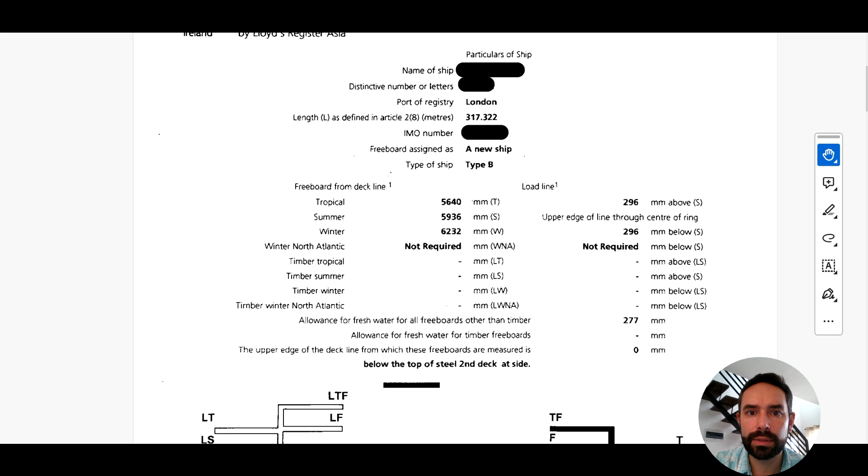And you can see here, originally the freeboard was assigned as a new ship, which is not surprising, and she was a type B ship, which means she was not a tanker. Different calculations for tankers because they are intrinsically more watertight because they don't have very many holes in them.

The details on the freeboard and the marks, these marks are to be permanently marked upon the hull with welds and painted, and the quality of those marks and the paint is something that will be inspected during every survey.

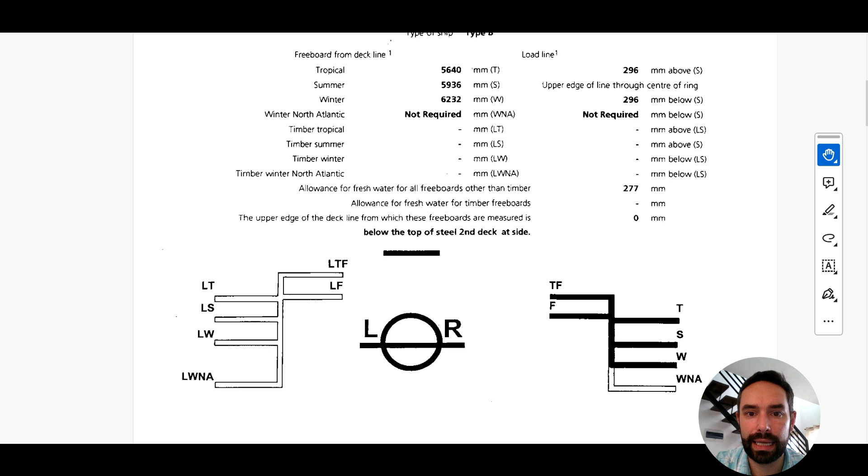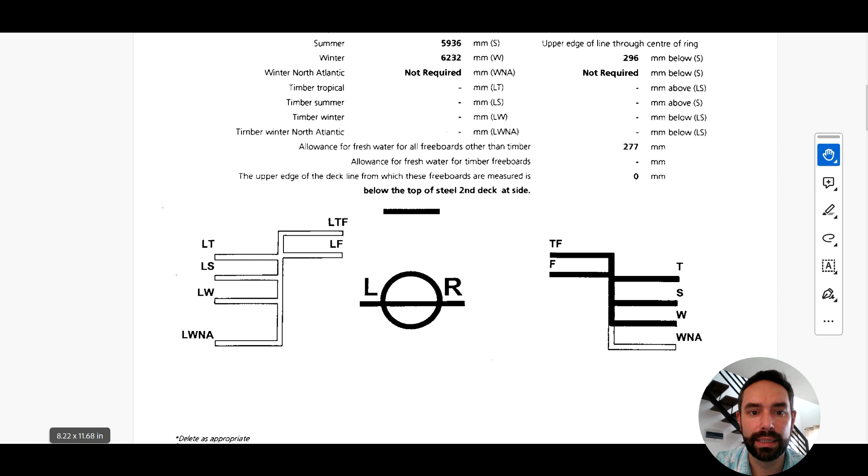The actual distances here in millimetres from the deck line, and the position of the deck line is indicated as well. So you should be able to find all of these marks. Obviously the ones in black are the ones that are required to be marked, and because this is not a timber carrying ship, she is not issued with a timber or lumber freeboard.

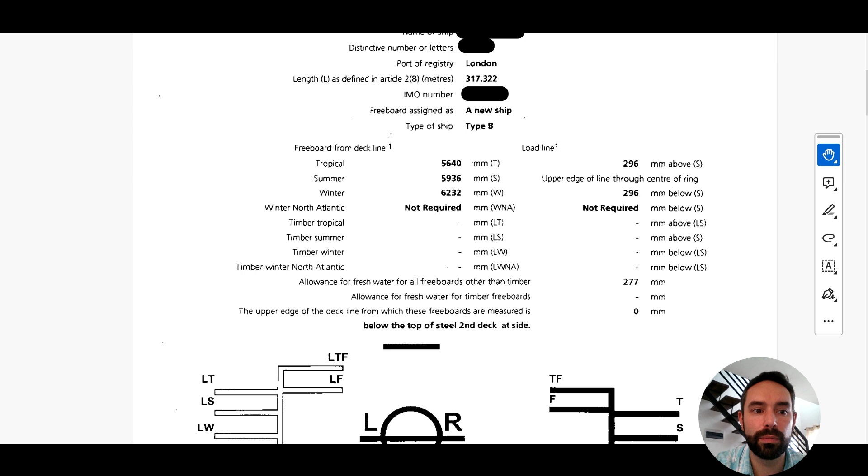Then on the second page you will find, let's go back. This information also will probably be transcribed into your official logbook and will form the basis of your freeboard calculations on departure from every port.

Interesting fact. So this certificate was valid 2014 and was valid until 2019. They're 5-year certificates in line with the harmonisation of certification. It was issued by Lloyd's Register, and at the time when I took a copy of this had 2 annual surveys, one in 2015, one in 2016, and they was endorsed accordingly by the Lloyd's Register surveyor.

Now, useful though this certificate is, this is not the key information on what we'll be inspecting during a load line survey. That instead comes on the attached document, which is the conditions of assignment. So attached to or stored also with your certificates, the record of conditions of assignment.

This is not reissued with every certificate. However, the information is unlikely to change short of a fairly significant dry docking period. This was the original one issued in 2014 as the ship was built in Korea or Japan, I can't remember. And you will find every single one of the conditions of assignment.

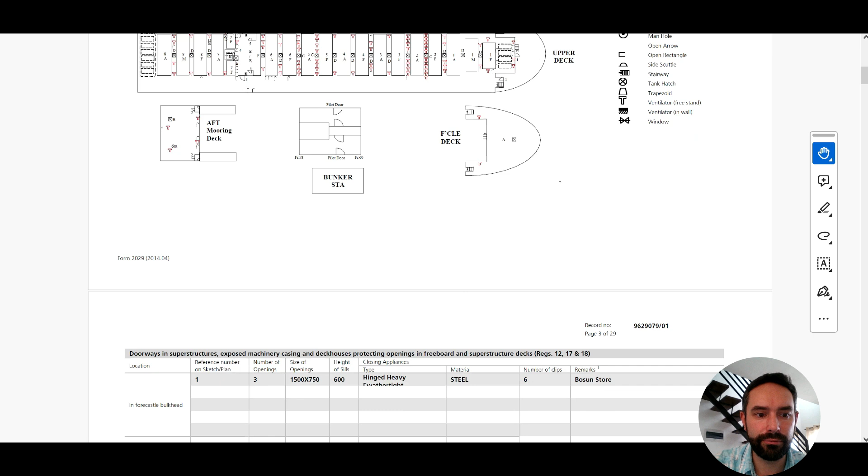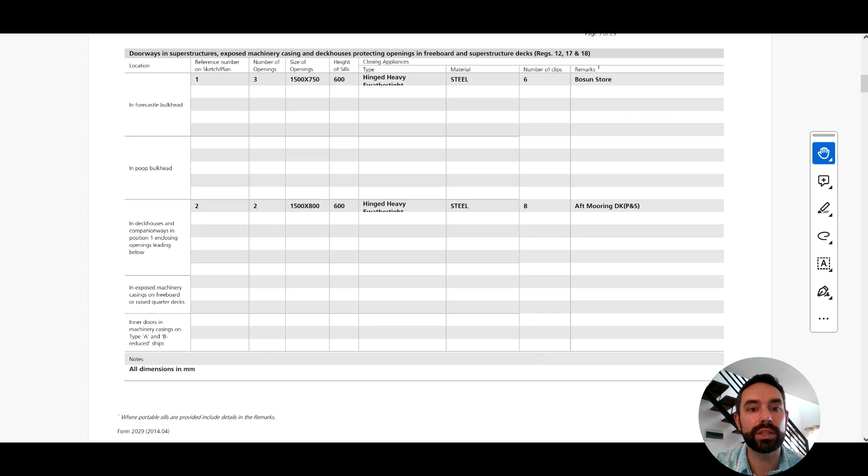Every one of these conditions of assignment must be provided in order for the ship to be issued with a load line certificate. When they're issued with that certificate, they have the conditions of assignment upon which it was based listed in this COA document which we have with us. And at each survey, these conditions of assignment will be inspected to make sure that they are still in good order and in the condition they were when the initial survey was carried out.

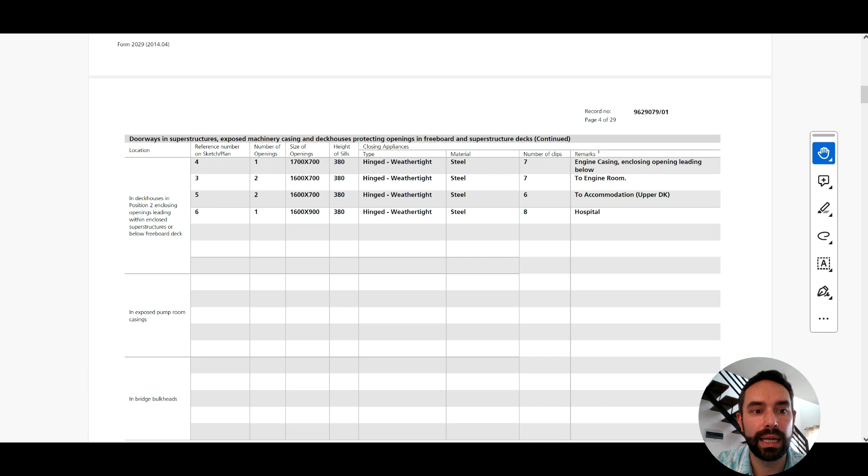Obviously, if the surveyor spots anything he feels is deficient to the weathertight or watertight integrity of the vessel as he's making that survey, that would also be picked up. It is not an inspection of the condition of the hull. That would take place as part of classification surveys, assuming the vessel is classed, and in the safety construction or PSSC inspections, normally during inspection of the ship bottom at every dry docking period.

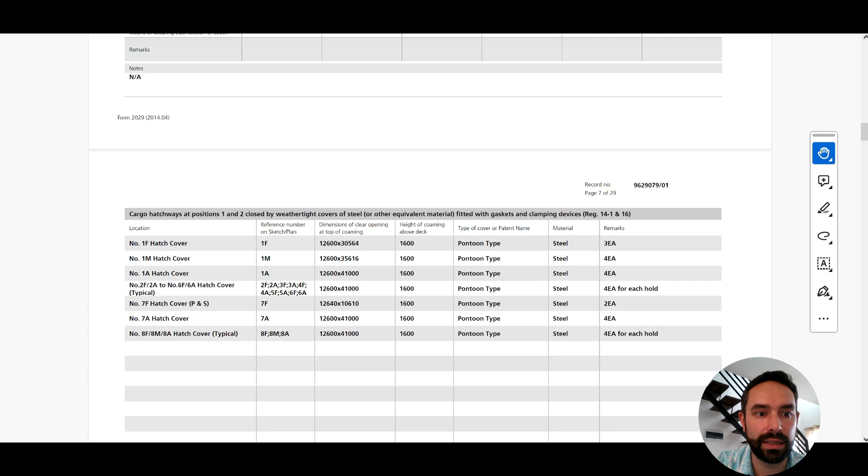Or in-water surveys every year. You can see this obviously is a container vessel. She does not have a lot of these things. She doesn't have hatch covers, portable covers, but there is space nonetheless here for everything. She does have big hatch covers for the container holds, and small hatches in the deck, so they're going to be looking - these ones are hinged - at the quality of the hinges.

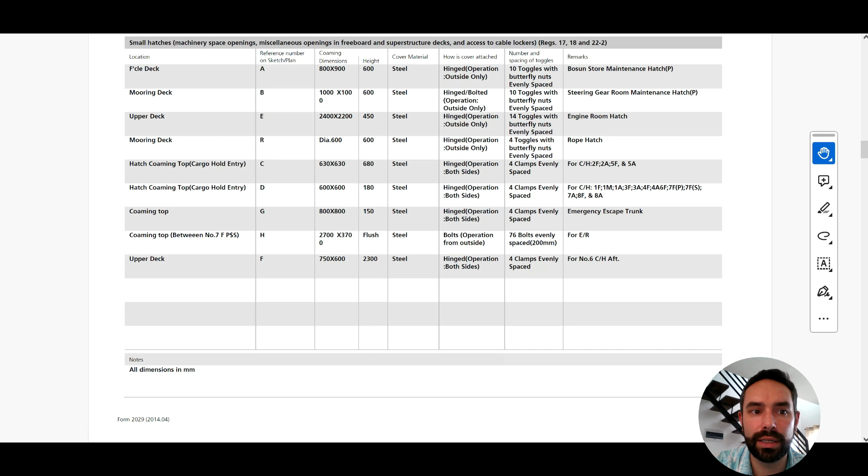They are toggled with butterfly nuts. They're going to be looking at the quality and any degradation on those.

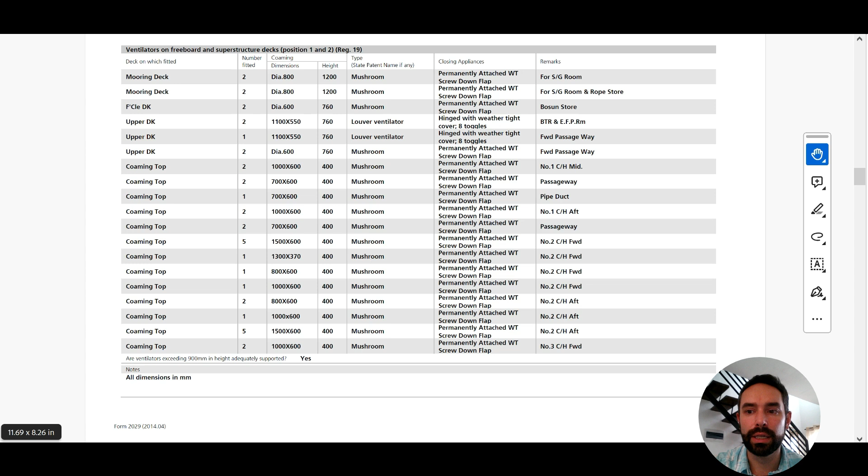And as a brief aside, let's not forget that load lines, as with most statutory surveys, are not there to protect the owner or the charterer or the cargo. They are there to protect the seafarers that work upon these ships. They're there to make sure that we are not working on substandard ships that have a risk of sinking or a risk to our health, and that we can't be taken advantage of by owners or charterers who would want to overload ships.

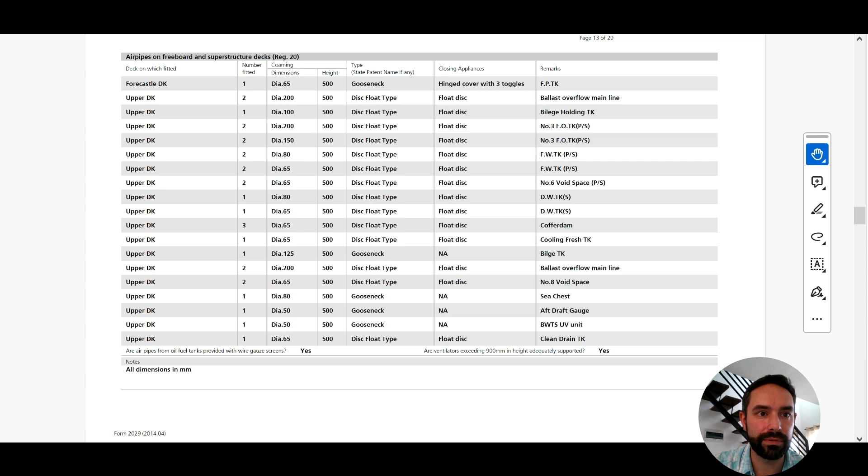So we have this long list of conditions of assignment, and really the best thing to do in advance of the survey is simply split these up between the relevant disciplines. Some of them are going to be more relevant for the chief mate and the boatswain, others more relevant for the chief engineer, and simply inspect that all of these conditions of assignment are in good order.

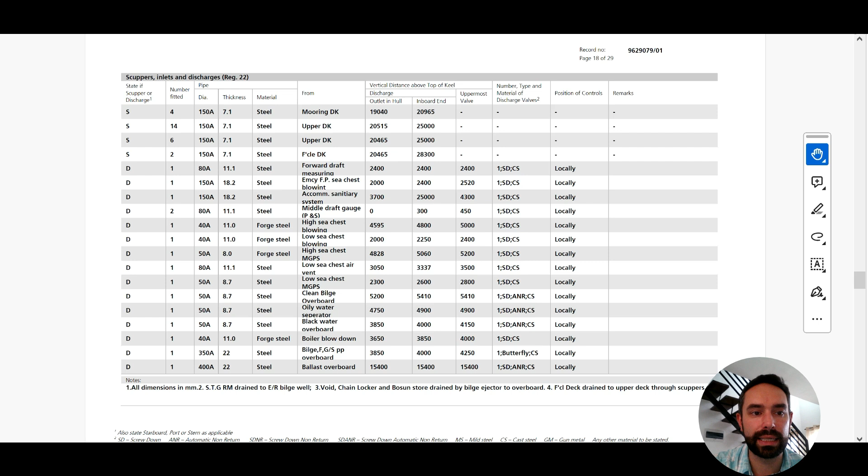Companionways and walkways around need to be properly protected around the forward end of the vessel, and scuppers and discharges are all in good order. Portholes have attached deadlights if required, and those deadlights are in good order and can be closed watertight.

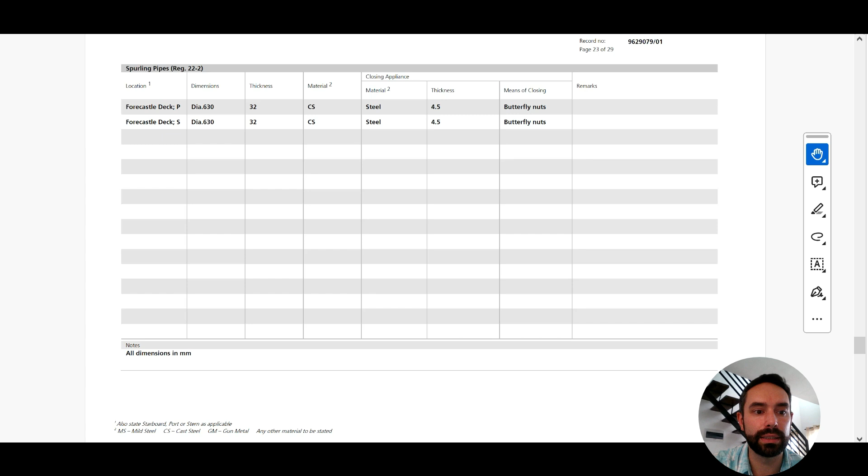Fundamentally, the load lines require any openings below the freeboard deck to be watertight and openings above to be weathertight, and they're all listed here.

And if you are not sure, or you're coming up for maybe a first survey, don't forget we can go back to the MCA guidance on here, and this will show us, first of all, the text of the convention, which is fundamentally the basis of the rules, and then show the MCA guidance.

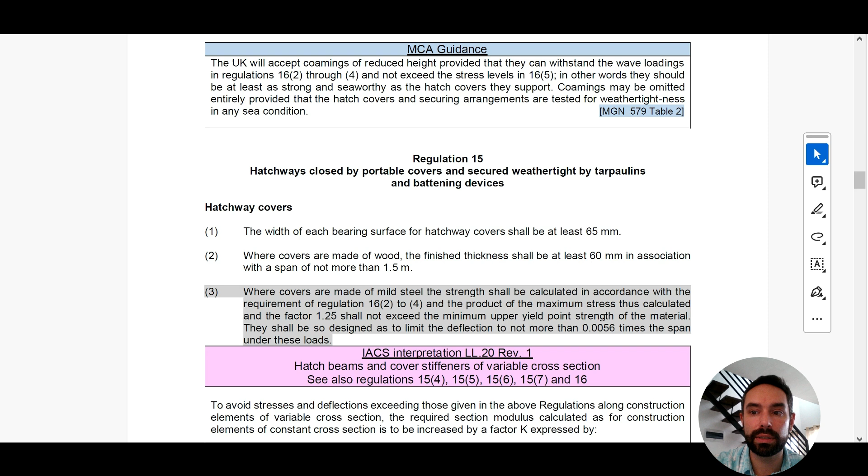So it's not a particularly interesting chapter, but perhaps we can find one. Sometimes how the locations of doors and things are located gets a little bit detailed. You just have to trust that the shipbuilder's done it correctly, but assuming it's on the conditions of assignment list for your ship, then the positioning of it has already been checked. We're just checking to make sure it remains in good order.

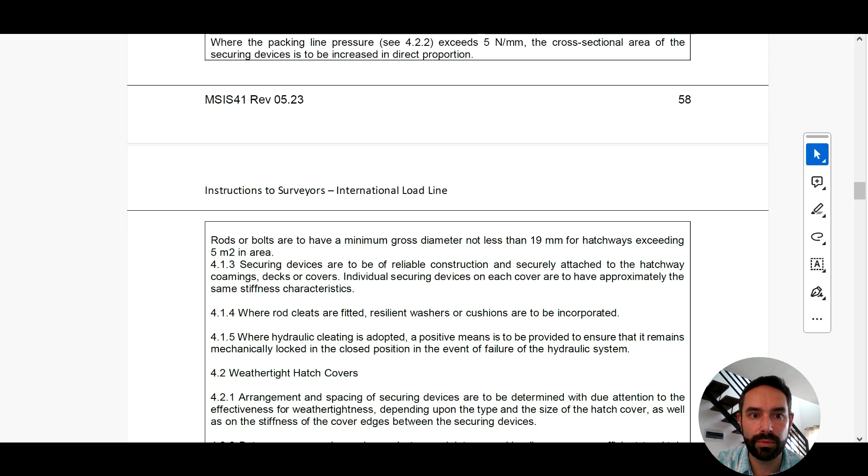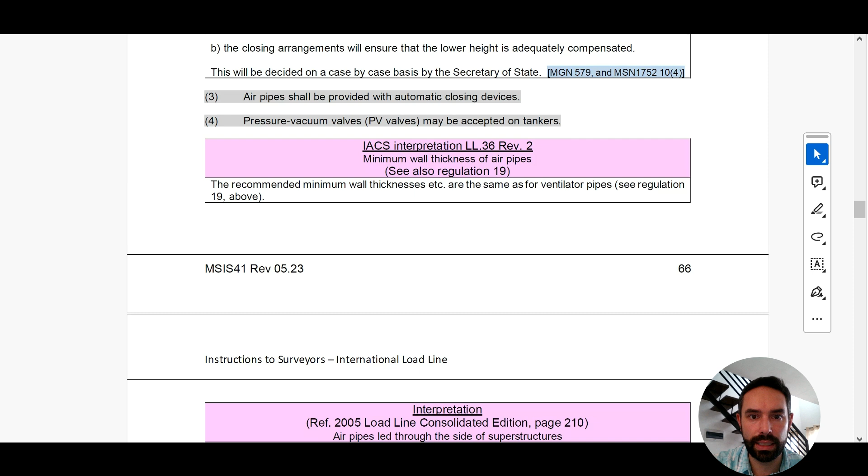So let's find something a little bit more here. I know there's good stuff towards the end. Hatch covers minimum loads. Air pipes - often overlooked, mainly because they're quite hard to check ourselves, often hidden away. Scuppers. Some pretty pictures. Garbage chutes - who has them these days?

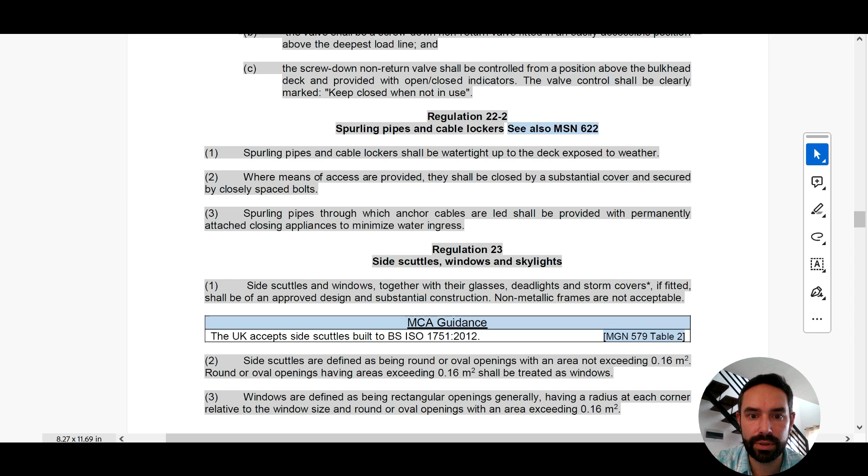So, for example, side scuttles, windows and sides and skylights. Side scuttles, windows, along with glasses, deadlights and covers, shall be of approved design and substantial. Non-metallic frames not accepted.

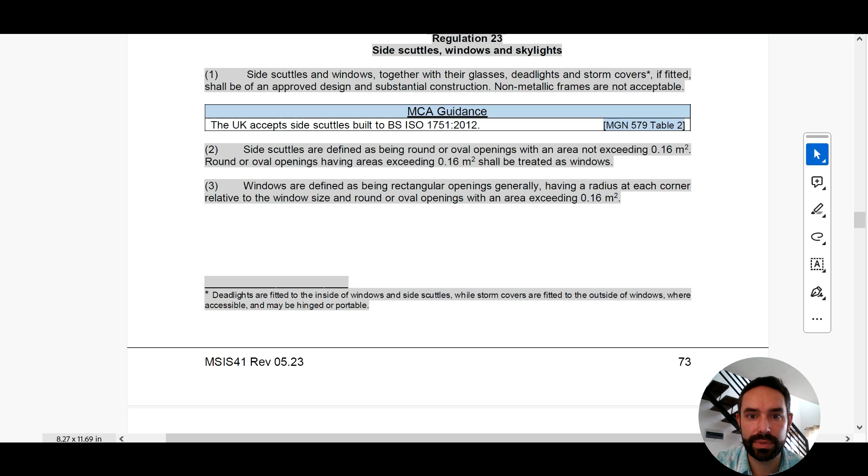And then we come to where windows shall or shall not be positioned. Starting there from 8, side scuttles and windows in the second tier, as defined above, shall be provided with hinged inside deadlights. So if you're not sure when you're inspecting, say, cabins - not that we would normally have cabins below the freeboard line, but in passenger ships we may well - we should see these windows, the portholes, must be capable of being closed and secured weather tight.

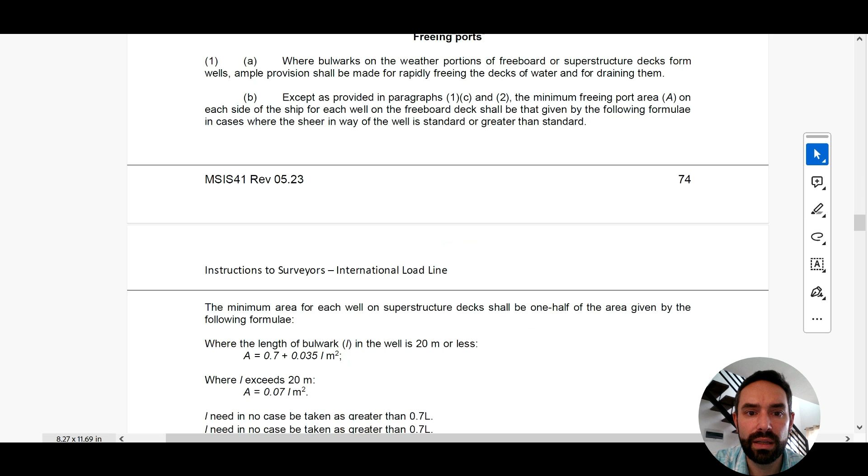Freeing ports must remain free and clear. They should not be obstructed. And there's lots of stuff there about the heights of gutter bars.

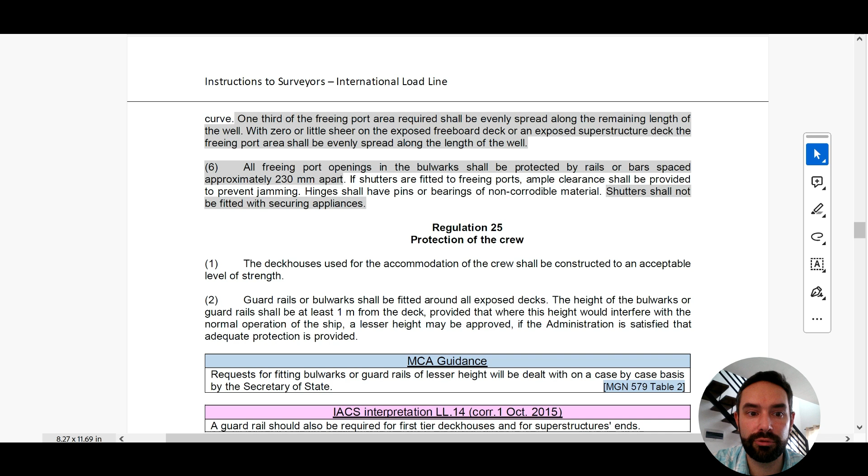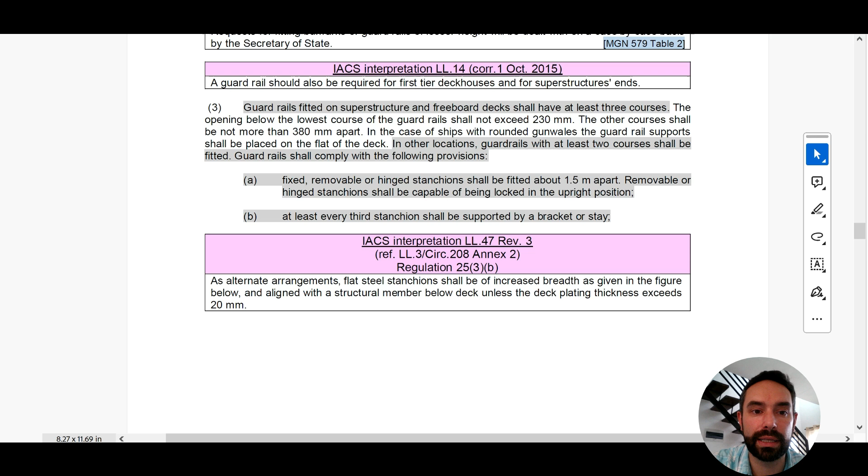Protection of the crew - this one is often a big focus by surveyors when they come on board, and a particular one is the security of guardrails and bulwarks in exposed areas. I'm thinking there on the forecastle, around the forward mooring deck. And because the focus of the survey, as always, is on the safety of the vessel and of the crew, things like guardrails are very much something that will be examined.

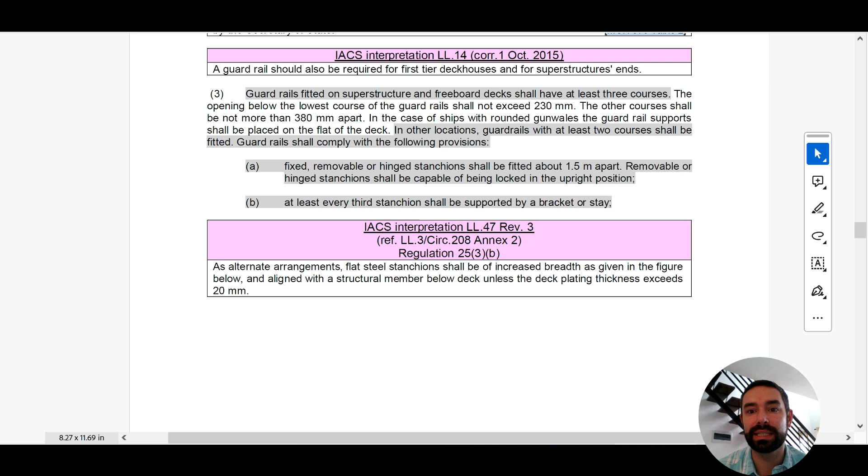They're also something that it'd be easy to mess up, I think. It wouldn't be unfeasible for maybe one of our stanchions to have become damaged and us to have repaired it, but then maybe we don't put them exactly 1.5 metres apart or less. So that's definitely something to check ahead of the inspection. And there's even little drawings there.

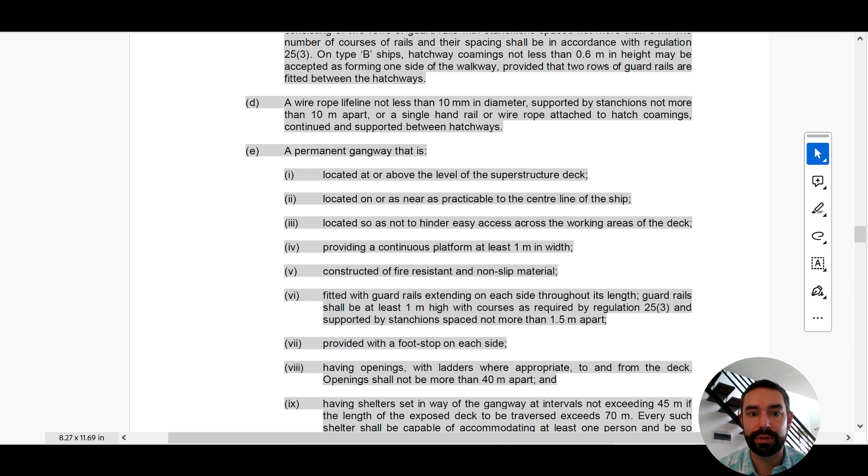Means of safe passage, and that's all about making sure there's permanent walkways through to less accessed parts of the ship. Anyway, very good document, this MSIS 41, definitely available on the internet. And there's a few other resources I thought we'd have a look over as well.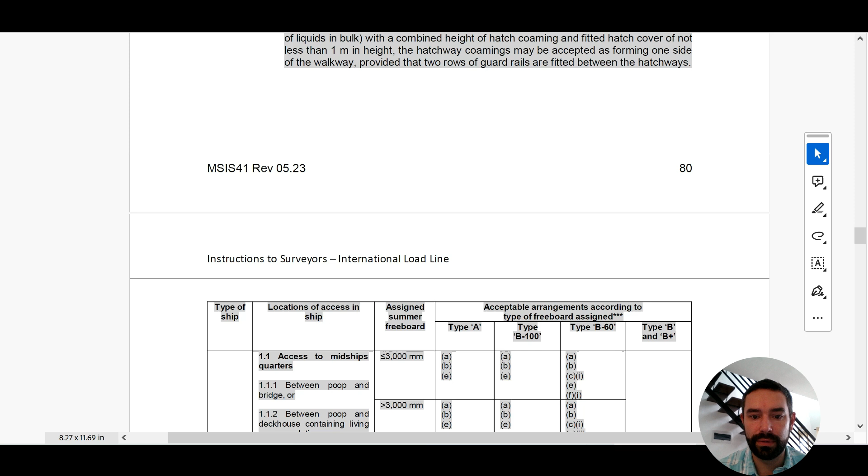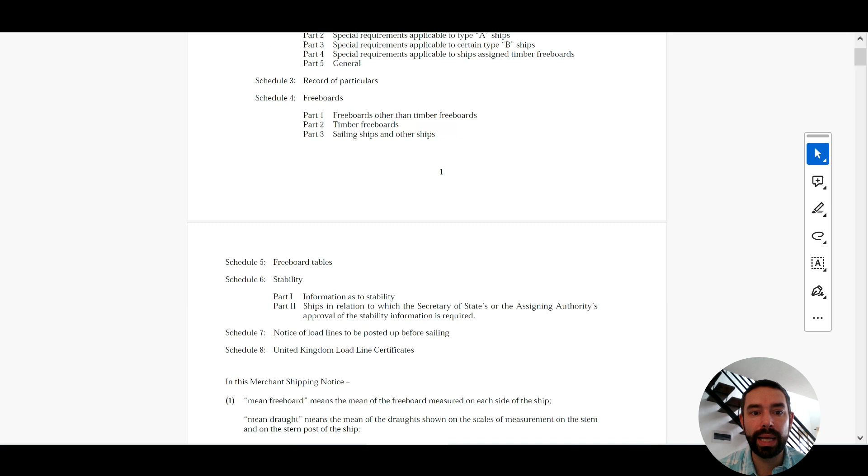So the official MCA guidance on the statutory instruments for Loadline is MSN 1752. It's actually very similar to the surveyor's guidance, but doesn't have all of the additional information. But it is basically a copy of what's in the Loadline convention, so you can get that, and that's available for free - you don't need to buy the Loadline book in order to access it.

And finally, you can download off the internet the Loadline map, which details exactly where the summer, tropical, and winter loading zones are - critical when planning your passage.